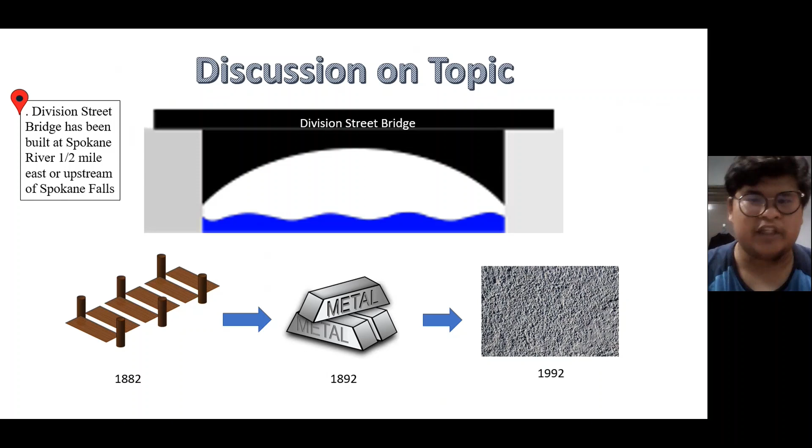Originally, in 1882, the bridge was built in the form of a wooden bridge, then upgraded in 1892 into a metal bridge, and lastly from 1992 onwards into a concrete form.

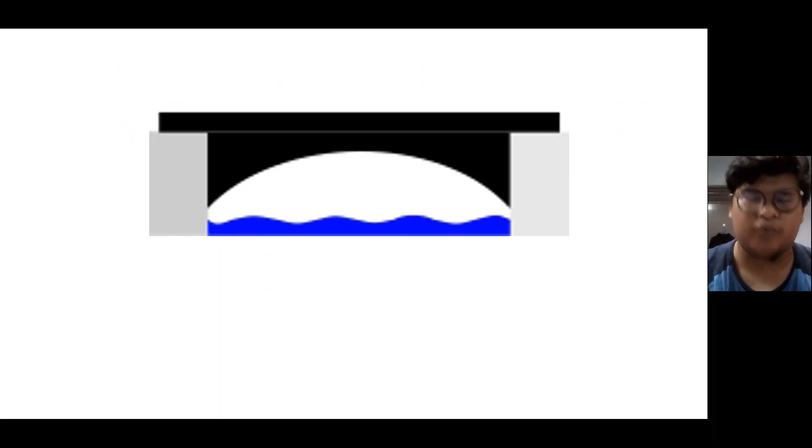In 1915, a terrible accident happened at night during the winter season, when all the water had become an icy lake.

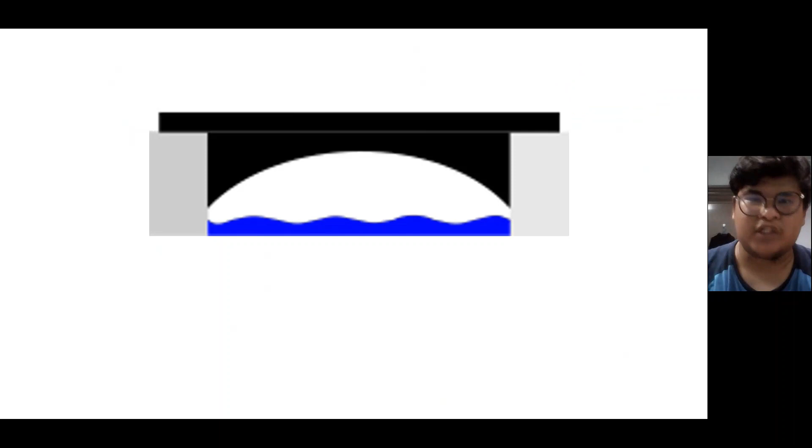The accident was initiated by two cars that drove toward each other to the center. When both of them reached the center, the bridge collapsed at both ends, cutting it in half. One of the cars fell into the icy river while the other got stuck on the electric rope wire.

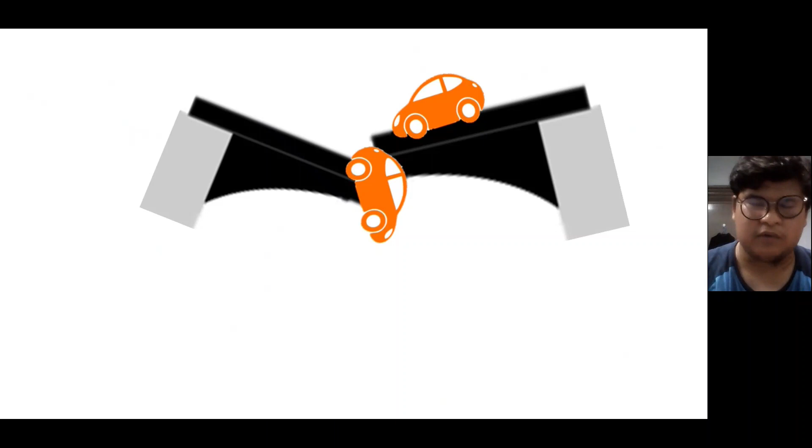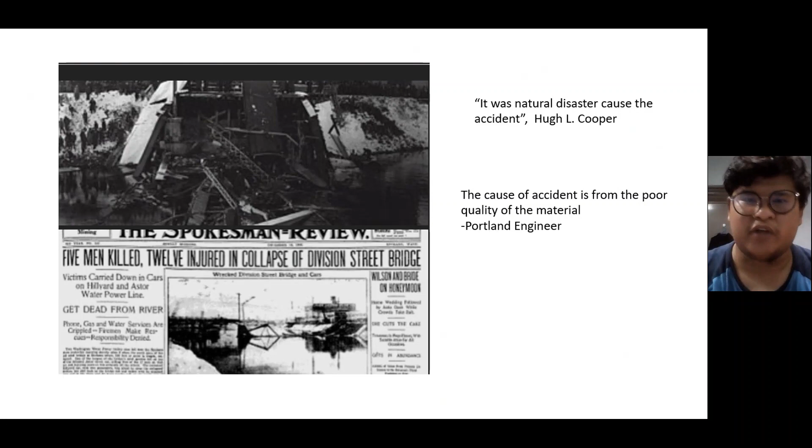Since it was dark, the rescue team could not save them, which resulted in 5 men killed while 12 were injured in the collapse of Division Street Bridge, as you can see in the paper below.

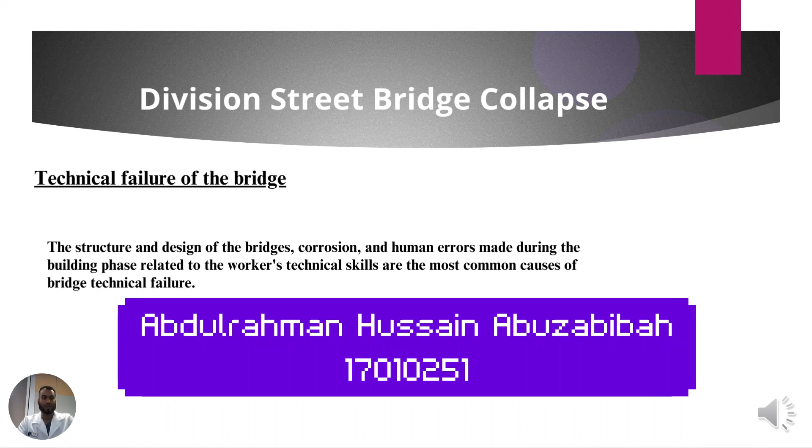Assalamu alaikum, I'm Abdulrahman Hussain, and today I'm going to talk about the technical failure that led the bridge to collapse. Generally speaking, technical failure of the bridge is the most common reason for bridge collapse.

Technical failures are found in the structure and design of the bridge: corrosion, human fault during construction related to worker technical skills, overloading, impact caused by accidents, lack of maintenance, or environmental phenomena caused by natural disasters could also trigger a bad impact on the bridge's safety.

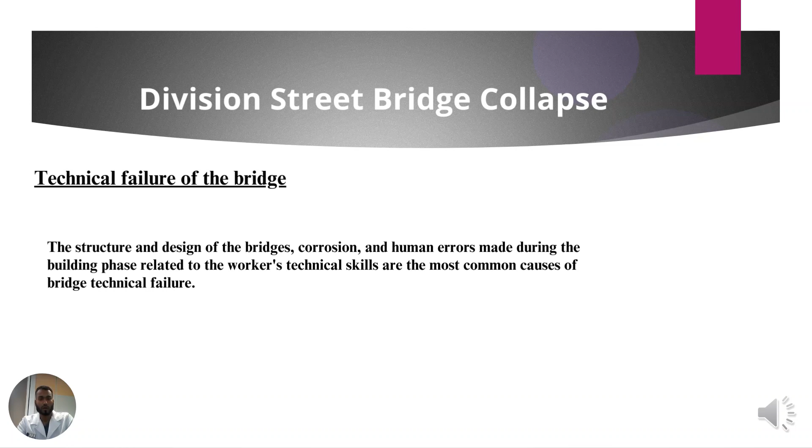When it comes to the structural analysis of a bridge, we can define it as the set of mechanics theory that expresses physical laws required to study and predict the behavior of a structure in general.

This analysis, or technical study, performed by civil engineers is done to make sure that all members, the number of joints, trusses, load, and forces acting in the actual structure are calculated correctly, so the bridge can be in an equilibrium state.

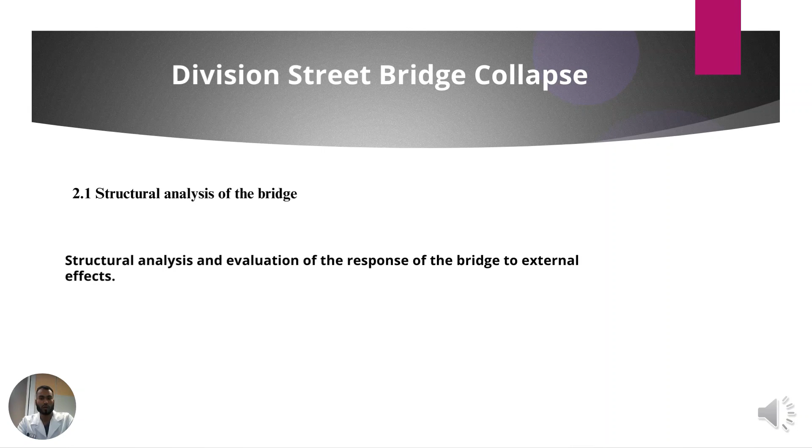Practically, when it comes to the design of bridges, it is a crucial parameter to work together with technical capability and civil engineering as well.

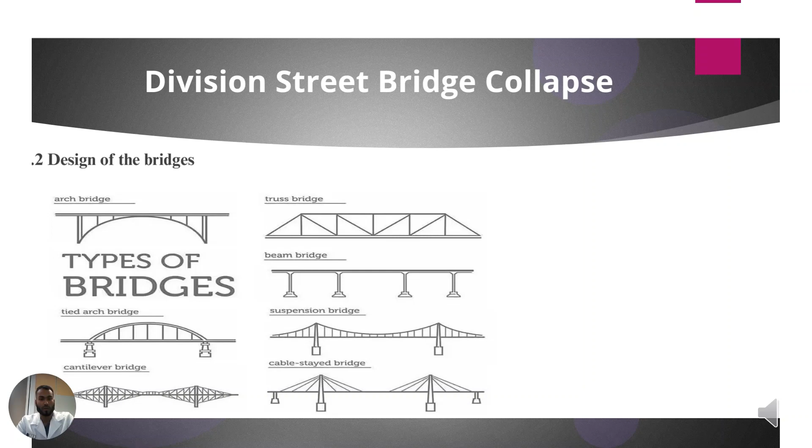Lastly, the selection of material needs to be taken into account. In this regard, steel bridges are one of the first typical bridge designs in innovative structures. For instance, the S355 steel grade was considered a high-strength steel grade, which makes it very suitable for bridge construction, as it allows more heavy objects to run through.

Therefore, we need to take into account the importance of the right material. The second parameter is the corrosion factor, which is important to draw attention to before construction of the actual bridge. There is a considerable need for a reliable method of predicting the risk of corrosion for steel embedded in concrete under given conditions.

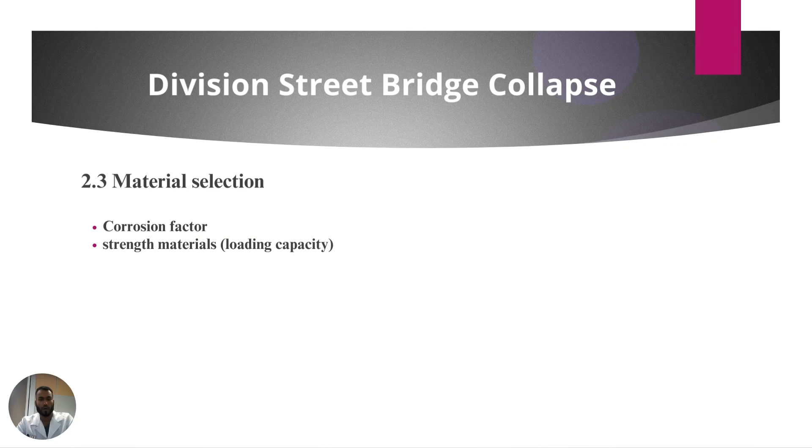Now I will be discussing the ethical reasons behind the falling of the Division Street Bridge that happened in 1915. Hugh L. Cooper, the designer of the bridge, had come forward to disclaim responsibility. He mentioned in the Spokesman-Review on December 21st, 1915, that the bridge had never been subjected to the working load it was designed to carry, which was 4,800 pounds per linear foot.

When the bridge failed, it was only 1/7 of the load that would normally be necessary to break the bridge. As an engineer, one of the requirements to be a professional engineer is to accept responsibility and accountability for decisions made against standard conduct and values. So Cooper should have been responsible for the 12 injured people and 5 deaths, despite the loss of the bridge, and paid their medical expenses instead of running away when the bridge collapsed.

The City Council of Spokane had also disclaimed responsibility for approving the building of the bridge using the materials proposed by Cooper. Apart from being held accountable for their work, the fire department team managed to save all the affected pedestrians in time.

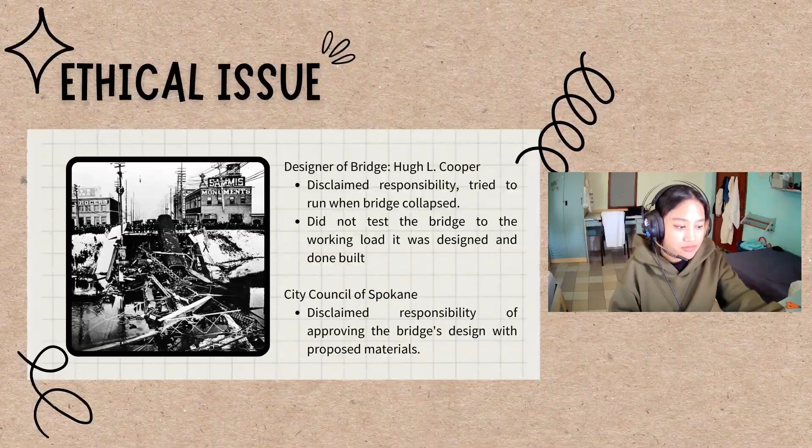Finally, I will present the conclusion and recommendations regarding the collapse of the Division Bridge.

From the ethical perspective, construction companies that commit to promoting good ethics in their practice will stand out against competitors. These ethics will affect the relationships the construction company has with its buyers as well as suppliers. If the company has a good reputation for decent ethics in business, it will be more likely to benefit from it in future relationships.

It is recommended that the construction company create a code of conduct to prioritize good practice and values in their workplace. Although it is not a legal requirement, companies that create this code of conduct can be considered to be taking ethics more seriously than others, and it should be considered going above and beyond what is required for the company.

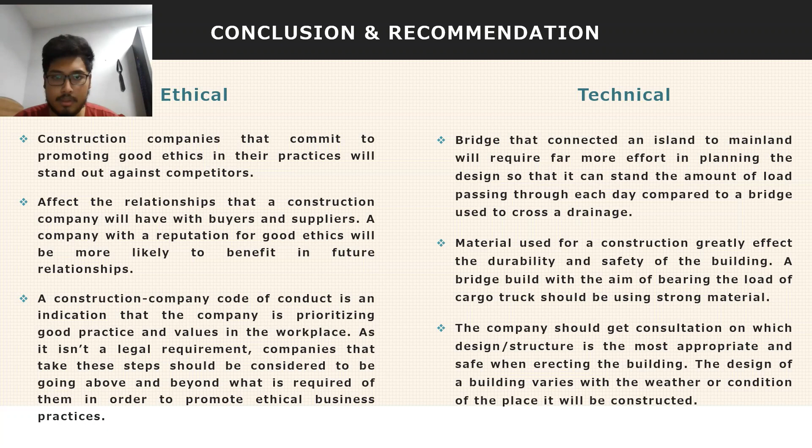Since the condition of the building will vary from place to place, such as a place that has heavy rain, or another place known to have earthquakes, for example. That's all from me. Thank you.